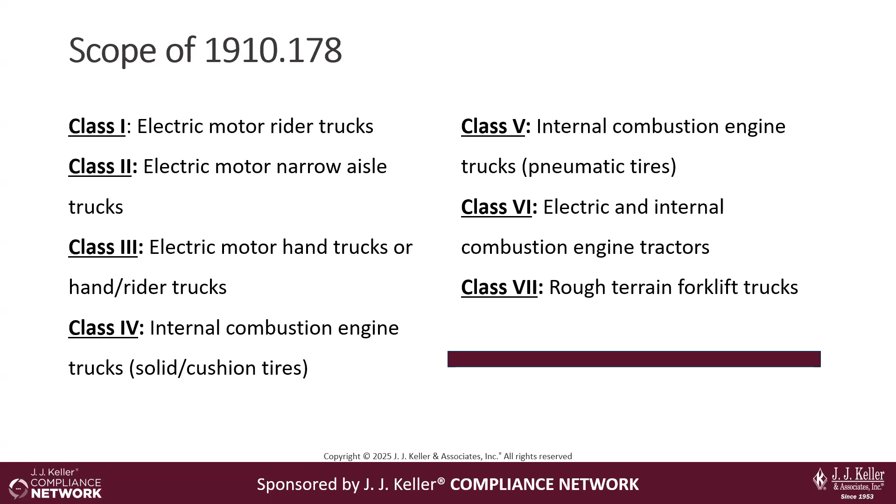So let's talk about what the standard does not cover. The major exception involves earth moving equipment. I'm talking front end loaders, backhoe loaders, things like that. These are not under the forklift standard. Even if this equipment has been modified to accept forks, OSHA said equipment that's designed to move earth is not under 1910-178. Also, we've been told by OSHA that golf carts are not covered, and there's letters of interpretation stating that scissor lifts are not covered. These are generally people movers, not material movers. Now, of course, you probably want to train scissor lift operators, but it's not actually under 178. And then, of course, equipment like hand carts that are not powered. A pallet jack, for example, a non-powered pallet jack, that's not covered because, hey, they're not powered vehicles.

Now, depending on the industry, the equipment might be covered under another standard. There's a construction standard on material handling equipment, for example. And of course, the general duty clause would apply where OSHA often references industry standards and manufacturer operating instructions. So, like for scissor lifts, I mentioned, you do want to train scissor lift operators even if they're not falling under the forklift standard.

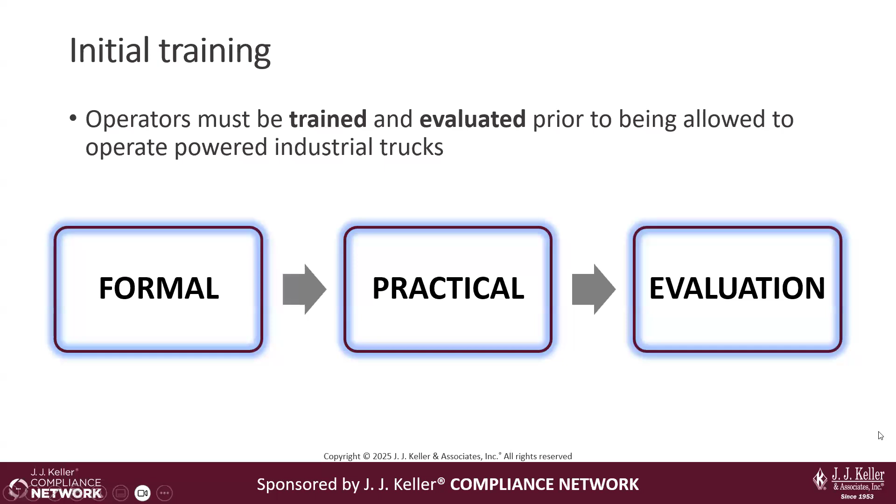So aside from requirements for how to do the training, OSHA does give a fairly detailed list of topics to cover during training. The main categories are truck-related topics and workplace-related topics.

Remember, OSHA does require you to include information on that forklift standard 1910-178 as part of the training. That can be easy to overlook, and a good way to approach it is during that classroom portion of the program. So as we go over the truck and workplace related topics, keep in mind if a topic does not apply to your vehicles or your workplace, you don't have to train on it.

For example, if you don't have any ramps or inclines in your facility, your operators don't need training on that, or if there's no hazardous atmosphere environments or something like that.

Now, the way the standard is written, you might want something to back up and justify your decision to skip a topic, just in case an OSHA inspector asks about it. So maybe you put down a written statement that a survey of the workplace found that there are no ramps or inclines in the facility, so that's why you didn't train on it, and you can sign and date that statement. It's a just-in-case kind of thing.

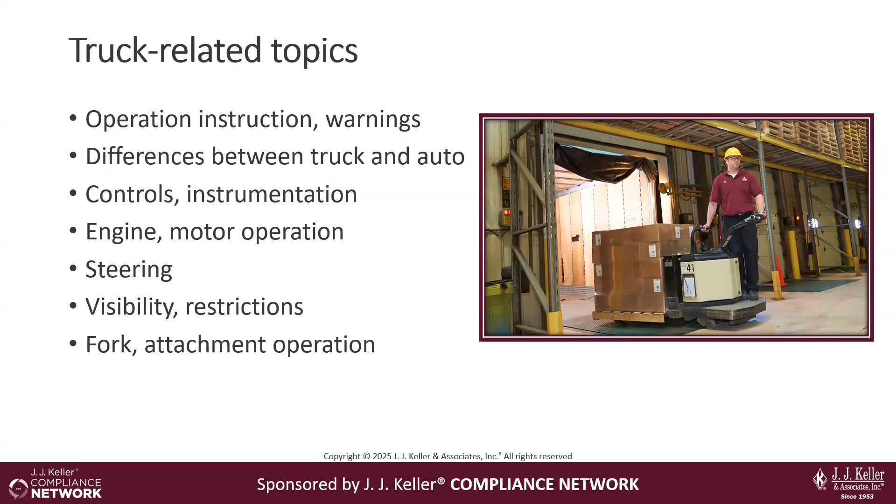On the operator's manual, we get questions on access to it. OSHA does not require that you keep it on the truck—I think it'd get dirty or fall off. In fact, it doesn't specifically require you to provide employee access to the manual, but it does make sense to have that available. And of course, if you do any in-house maintenance or repairs, your mechanics are going to want to be able to refer to that manual also.

A lot of these truck related topics lend themselves to the practical part of the training program. It's easier to demonstrate how the controls work and show them the capacity plate rather than trying to describe that during a classroom lecture. But you can still introduce these topics in the classroom portion, and then it's more of a specific review when you get out there, and easier to answer questions sometimes in the classroom.

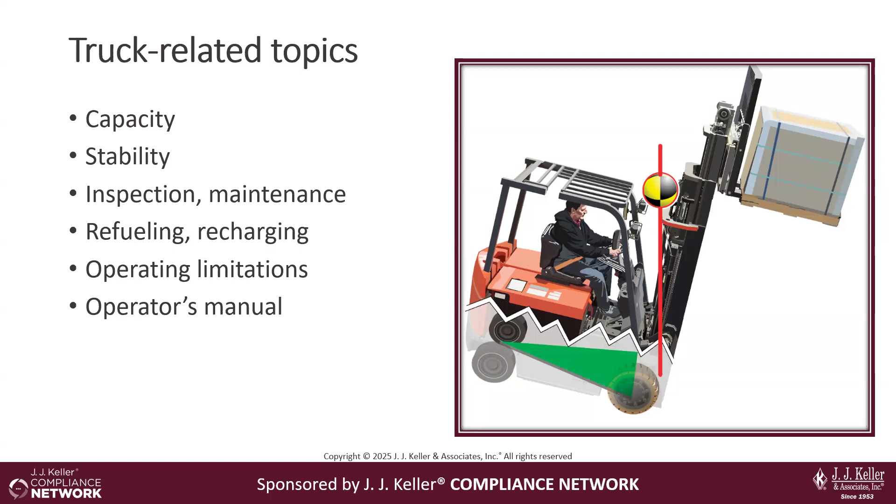Now let's get into the workplace specific topics. A lot of these are unique to your facility. Training videos and other products can cover things like inclines, but it's not quite the same as your workplace necessarily. So videos and other training materials are valuable additions to your program—employees will learn a lot from them—but you will need to verify that you've covered all the specific information and hazards in your workplace as your operators are running in that area.

Trainees must successfully complete the formal and practical portions. How you determine that success is completely up to you. For the classroom portion, you might give a written test or a verbal test or otherwise evaluate their knowledge. We get asked how many questions can they get wrong—well, that's entirely up to you. For the practical training, of course, the trainee must be able to safely perform the operations that they're going to use on the job.

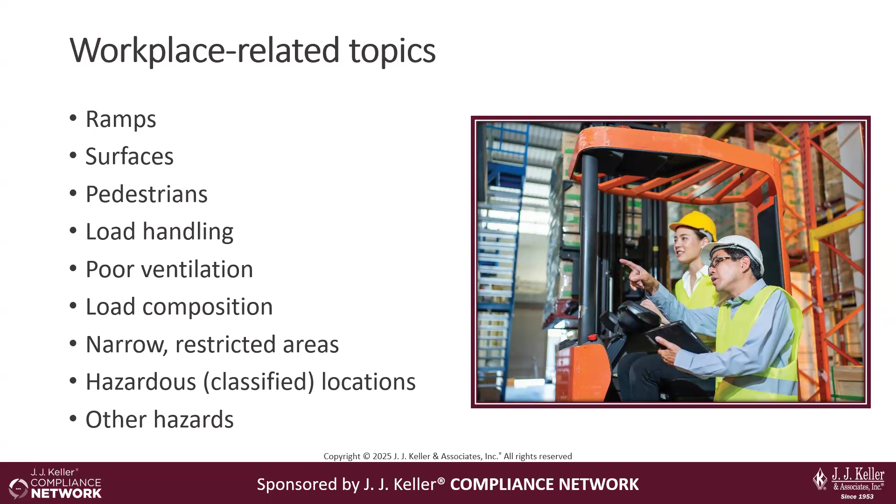So far, everything we've said about training applies to initial training for new operators. But this also leads us to a discussion on refresher training and on avoiding duplicative training. Sometimes you get a newly hired forklift operator who has experience, maybe with a previous employer. As we'll discuss shortly, OSHA does allow you to accept previous training, but generally experienced hires, even if someone's been driving a forklift 20 years, they're still going to need training on the workplace specific topics and situations unique to your operating environment.

It could be because the operator was observed operating the vehicle in an unsafe manner—that would trigger the need for refresher training. Or it could be because there's an incident or a near miss. Safety issues could be uncovered during a performance evaluation, or the operator is assigned to drive a different type of truck. For example, if you have an operator trained on a sit-down rider versus a stand-up truck or an order picker or something else, operators need to be trained on each type of forklift they will be operating.

Another reason refresher training may be necessary is if you have a condition in the workplace that changes in a manner that could affect safe operation of the truck. So the example used earlier—if your workplace does not have any ramps or inclines, you don't necessarily need to train your operators on that particular topic. Now, if your facility does upgrades, or there's been changes or recent construction, where now all of a sudden you do have ramps and inclines, that would be a cause for refresher training, at least on that topic.

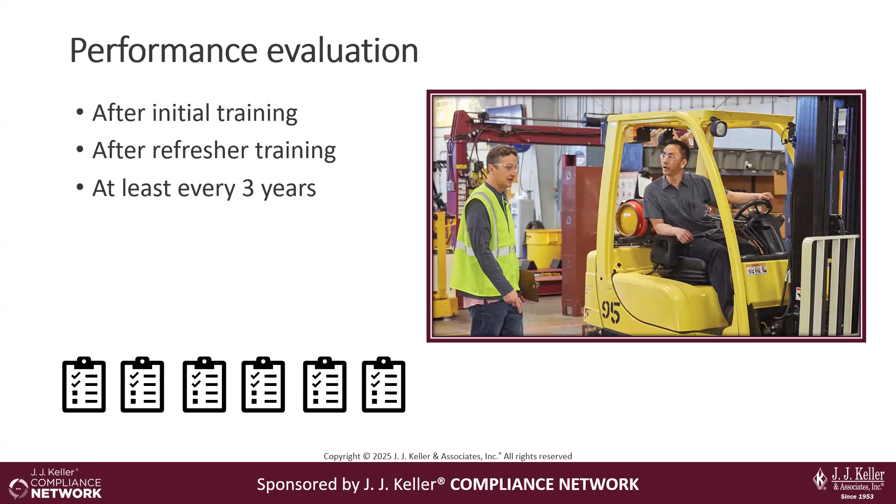A key point to note here is that this evaluation must be more than just a written or verbal test. The employer must observe the operator in action performing all tasks related to running the forklift. And the evaluation must be conducted by someone who has the knowledge, training, and experience to evaluate the truck operator's competence. Sometimes these evaluations can last over the period of a few days if the operators are operating multiple types of forklifts or in multiple different areas. So you want to make sure you're providing a solid evaluation of their competency at least every 3 years.

Now, another common question we get is if OSHA requires giving operators a wallet card or a license. Federal OSHA does not require a license or a wallet card. It may be somewhat common in some industries, although employers are not required to do this. Wallet cards do help supervisors quickly determine what type of equipment employees have been trained on, and can also reinforce to operators just how critical forklift operation is. Having something tangible that lets someone know yes, you can operate this equipment, or no, you haven't been qualified, can go a long way and say a lot. So even though federal OSHA doesn't require it, it may not be a bad idea for employers to issue these certification cards.

Now, OSHA only requires that the employer certify the training has been done. This simply means placing a record on file that the training and evaluation was completed, along with the operator's name, the date of training, the date of evaluation, and the names of the persons who performed the training and evaluation. So if you have multiple trainers involved, where maybe one trainer is doing the classroom portion and another trainer, an experienced operator, is doing the field evaluation, make sure you're capturing the names of all trainers involved.

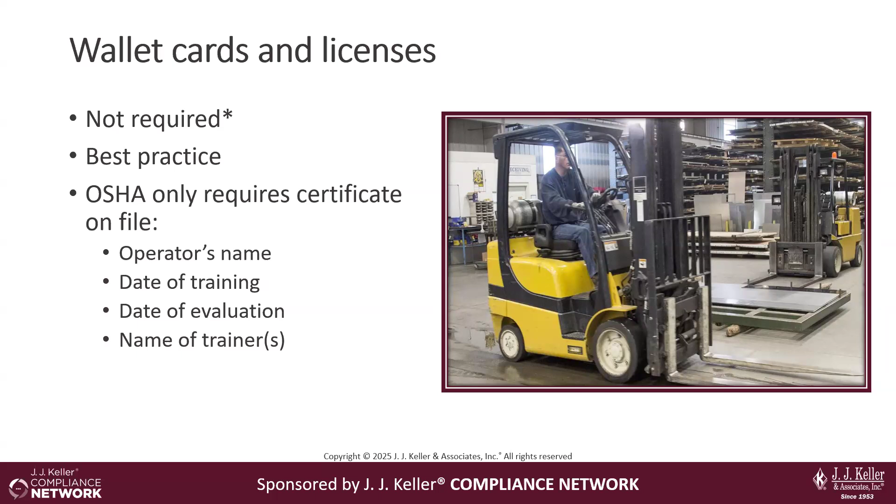All right, with that, I'm going to pass it back to Ed, and he's going to talk about forklift maintenance.

Thank you again. Maintenance questions do come up. Of course, if a truck is not safe to operate, you take it out of service immediately. If repairs need to be done, only an authorized person should perform them. Generally, the operator has not been trained to do repairs, and they're probably not authorized by the employer to do that. Repairs shouldn't be made where there's flammable gases or vapors present, or combustible dust, or other easily ignitable fibers. These are known as your class 1, 2, and 3 locations. So be careful of fire hazards when working on the fuel or ignition systems, and be aware that electric forklifts have their own set of hazards.

Also, use replacement parts from the manufacturer, as they should have the proper parts. We have seen issues when employers tried to use a more generic part and it doesn't quite fit. Also, operators should not alter the truck by adding parts that were not approved. You need to get permission from the manufacturer, or a professional engineer can approve it. But things like adding counterweights or even just adding lights are technically modifications to the forklift.

All right, inspections. In this section, we're going to answer some questions like: what are the OSHA requirements? What does the inspection consist of? When do you know if an issue warrants taking the vehicle out of service? And do inspections have to be documented? Oh, we get that one a lot.

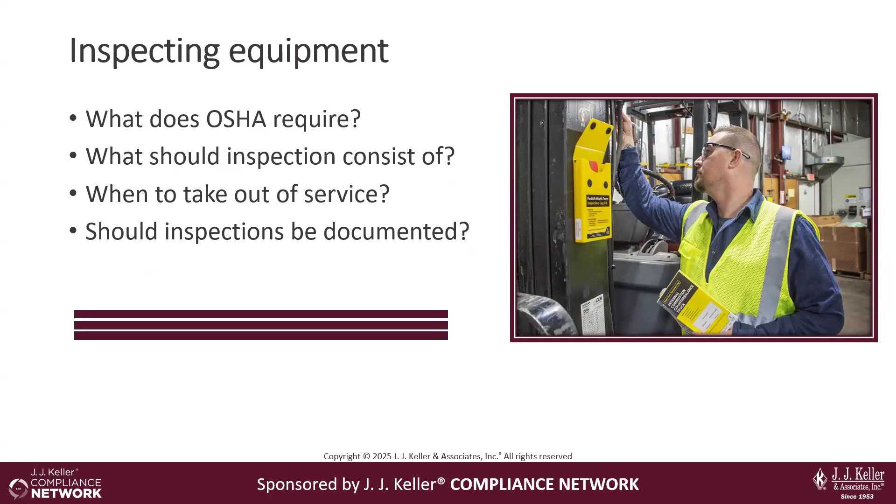So OSHA does require that equipment be inspected daily prior to use, or after each shift if used around the clock. The reg does say after the shift, but usually the next person does it at the start of the shift. That's a somewhat vague requirement, and I think that's why we get so many questions.

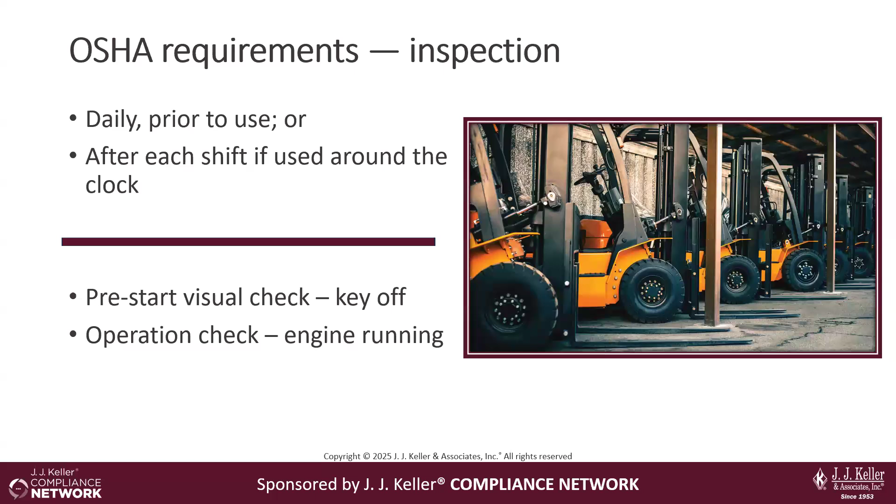So for how to inspect, first check the manufacturer's recommendations, because every truck is going to have specific features and unique inspection needs. Generally, an inspection should consist of two parts. First, the operator would do a pre-start visual check with the key off. Then the operator will perform an operational check with the engine running. Let me get a little more detail there.

So for that pre-start, on your screen here are some common items general to most forklifts. Again, these are not in the OSHA standard; they are based on recommendations in OSHA's online forklift e-tool. Of course, a lot of these things appear in most operating manuals - fluid levels, for example. You want to check fluid levels, leaks, cracks, defects, pretty much all parts of the forklift that you can check with the engine off. Give close attention to tires and fork condition, anything that could really jeopardize safety.

Note that these are most the general items for most forklifts. Again, there's going to be additional items, like say for an electric forklift or an LP gas fueled forklift, and those types may require additional PPE for the inspection. With electric forklifts, there's potential for battery electrolyte exposure.

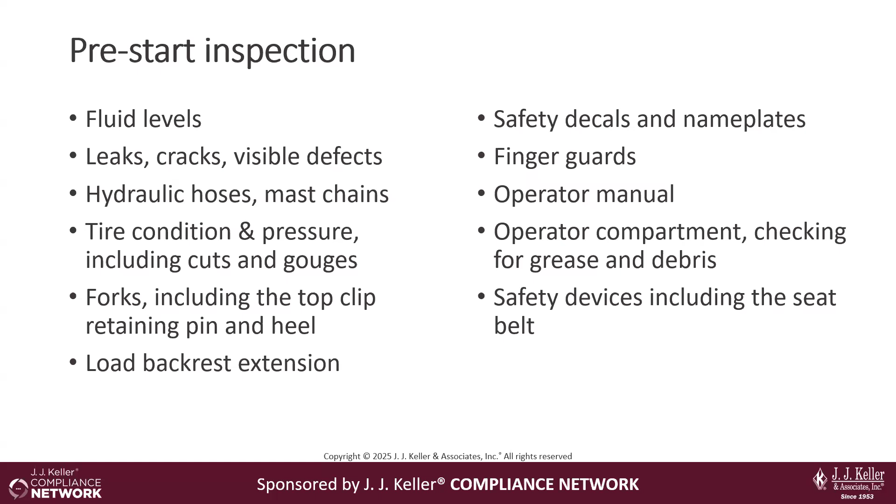And of course, if you're changing the cylinder on an LP gas forklift, there could be a risk of freeze burn. So make sure employees have the personal protective equipment needed.

Make sure everything's working. Even something like a non-functioning horn or a light not working does require removing the equipment from service for repair. You can't just, I actually talked to one guy who did an OSHA inspection and he said the forklift driver was yelling honk honk at intersections because the horn wasn't working. He said, no, that's not good enough.

And again, aside from these items we've been talking about, check the manufacturer's recommendations as well. Each truck, of course, is going to have unique features and may require unique inspections.

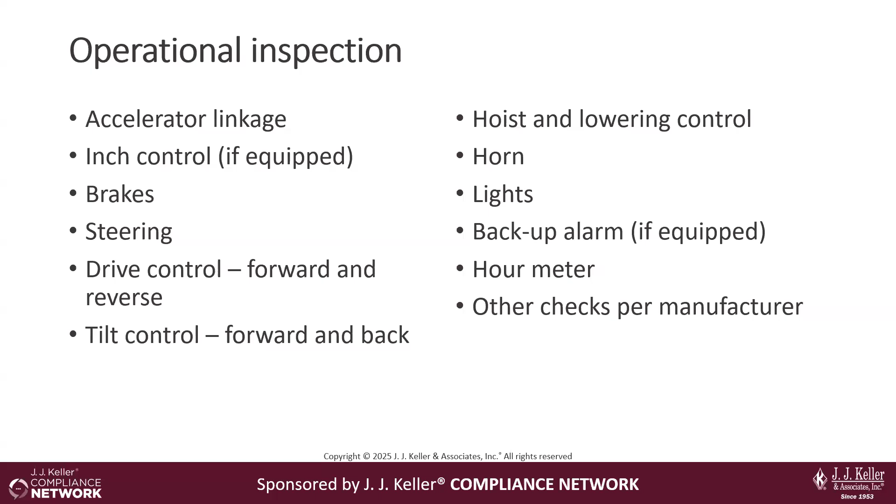All right, so if you're doing the daily inspection, are you keeping records? Well, believe it or not, OSHA does not actually require that you document your daily inspections or even do them in writing. And that, of course, means the related question we get, how long do we keep the records? Well, there's no record retention time. You can document them, but there's no retention period.

Now, obviously, even though it's not required, using a checklist, whether it's electronic or on paper, it's a good idea for a couple of reasons. First, it ensures that all essential features of the vehicle are inspected. It'd be easy for someone to overlook or forget something. And it can help provide evidence to an OSHA compliance officer that the vehicles are in fact being inspected as required.

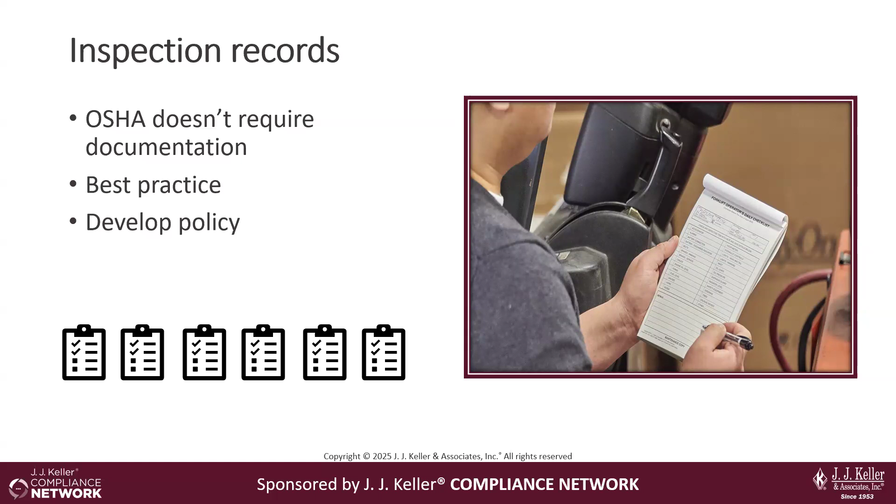By the way, if you want to keep them, my best answer is 6 months because OSHA has a 6-month statute of limitations to issue a citation. So if it's been more than 6 months since you did an inspection, if you missed a day, they can't cite you for that anyway.

All right, back to Gina to talk about attachments and modifications. I know this is one of her favorites.

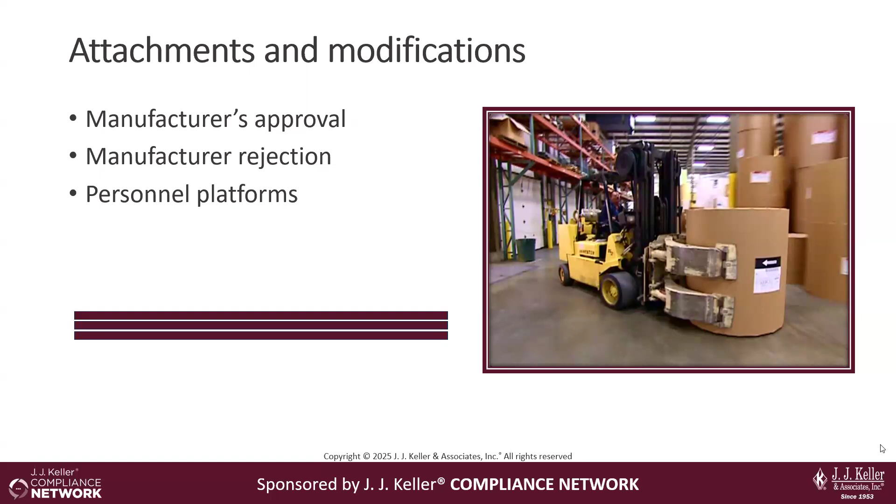Thank you, Ed. Yes. So, as mentioned, we're going to be moving on to attachments, modifications, and we'll answer questions about things like getting manufacturer's approval, what to do if the manufacturer rejects your request for additional modifications. And we'll also talk about personnel platforms, which is a topic that I think I mentioned earlier, we get a lot of questions on. So, let's dive in.

Here's one of those things that trips people up a lot. So OSHA requires that manufacturer written approval for additions or modifications that affect capacity and safe operation. This is one of those, hot topics. So OSHA has interpreted this pretty liberally to cover anything from warning lights to personnel platforms.

So if you plan on adding to or modifying your powered industrial trucks, you must get the manufacturer's prior written approval and then should change the capacity plates and any operating instructions accordingly. So there can be a lot that goes into that.

But what do you do if the manufacturer says no or simply doesn't reply at all? And as you can imagine, that's pretty common for the manufacturer not to give a response at all, or even simply say, no, we don't approve this type of modification. And that, again, happens a lot, and OSHA does address it.

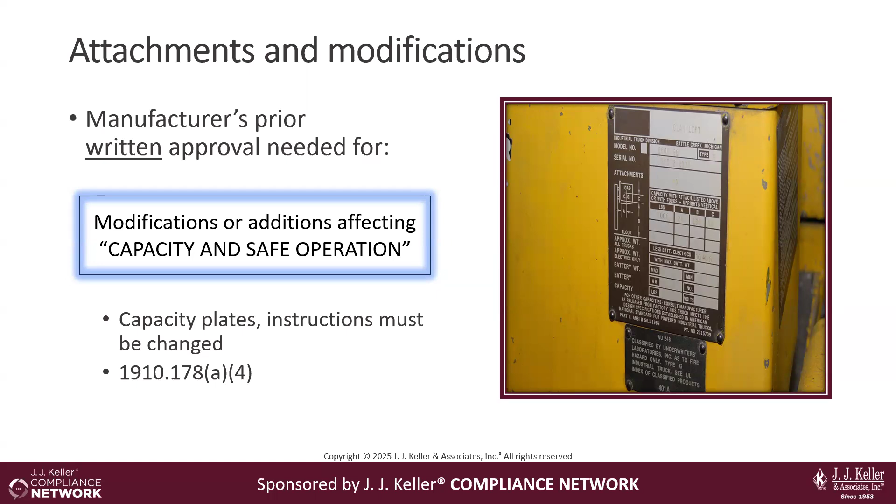So in an April 1997 letter of interpretation, OSHA said that if an employer seeks written approval from the manufacturer for modifications or additions to a forklift and the manufacturer says no, or if they don't respond, then OSHA will accept a written approval of that modification or addition from a qualified registered professional engineer. So you can get a PE to sign off on whatever addition or modification you're making if the manufacturer says no, or if they simply don't respond.

Now, the PE must perform a safety analysis and address any safety or structural issues contained in the manufacturer's negative response prior to granting approval. Also, make sure that you change the equipment's data plates accordingly, because that is the main thing that OSHA will be looking for modifications.

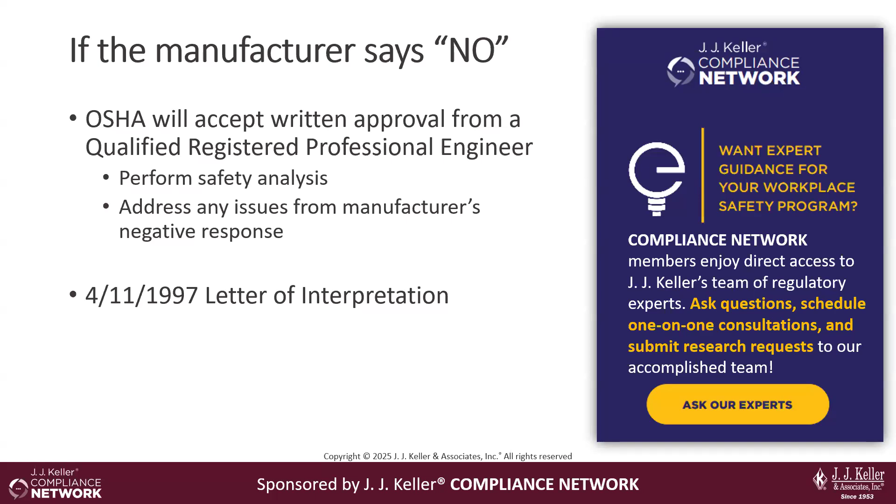Moving on to personnel platforms, also known as man baskets or work platform cages. OSHA says that the platforms are considered attachments, and so therefore these would require the manufacturer's written approval before using them. So that's the first thing to consider: we're talking about adding a platform to equipment such as a sit-down forklift, directly to the forks, and not just using equipment designed to lift personnel like order pickers.

This does not apply to order pickers. It does not apply to aerial lifts and scissor lifts that are not covered under the forklift powered industrial truck standard. But once you've determined that it's okay with the manufacturer, then you have to deal with the safety issues.

So we have fall hazards. Fall hazards are obviously a major concern, so workers must be protected either by guardrails or by a personal fall arrest system. In addition, the platform itself needs to be secured. Otherwise, it can tip off or slide off, and obviously that's not a situation we want to expose our workers to. In addition, the operator needs to remain at the controls and exercise caution during operation.

So the OSHA regulation doesn't really get into the details of using personnel platforms, but OSHA has referenced the industry standard, the ANSI industry standard, B56.1. That provides quite a bit of guidance on fall protection and using secured personnel platforms, and procedures for elevating personnel on forklifts and powered industrial trucks.

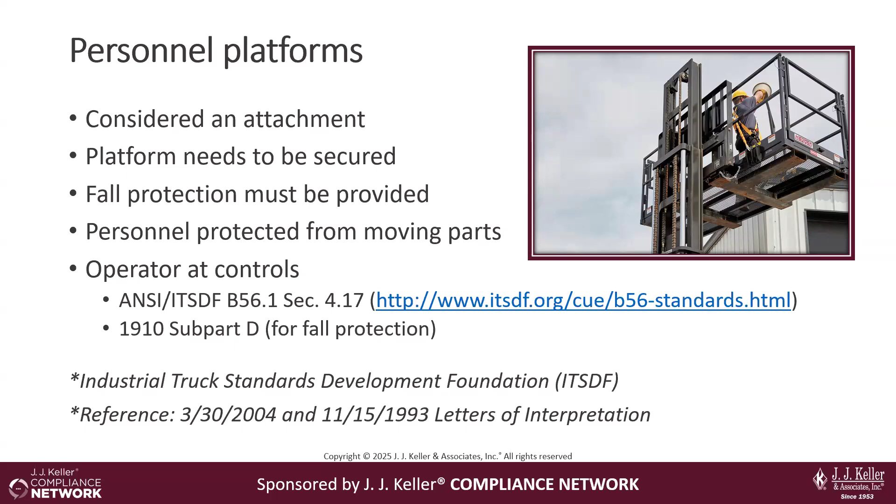And while you're doing that, I can share a personal experience. I was a forklift driver back in the 1990s, so we're well past any statute of limitations on that. But I can tell you, when you're doing things unsafe, I had done things like raising the tines before I came to a complete stop in front of the rack, or carrying unstable loads that were bouncing around that I really shouldn't have been carrying. So these are the kind of things you can observe people doing unsafely. I was in college back then.

I didn't really have refresher training on that, and I didn't cause any accidents. But these are things where you get observations, and we don't want to wait until there's a near miss, right? We don't want to wait until somebody gets injured or almost gets injured. So if a supervisor sees someone doing something unsafe, they'd better be able to recognize that and report it up the line. Then the supervisor might not be the one doing the refresher training—as Gina said, it's got to be someone qualified as a forklift trainer who gives that training. Maybe training isn't the solution here; there might be other issues involved, but OSHA does at least address it.

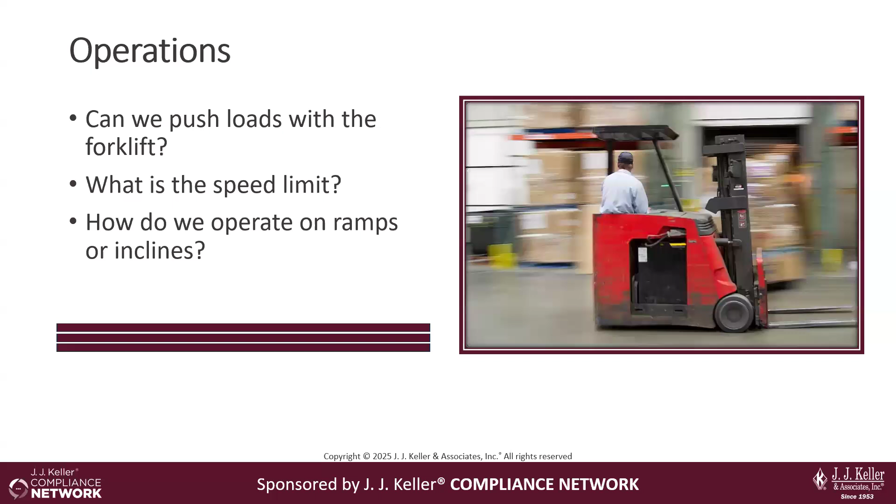I want to start with split forking and bulldozing. Split forking is when you lift two pallets using one fork each, and bulldozing means pushing a load on the floor with the forks. OSHA says those two practices could result in any number of hazards. First, forklifts are probably not designed to lift and move loads in the split forking or bulldozing manner. OSHA requires that employees receive training on any operating instructions, warnings, precautions, or prohibitions in the operator manual. So if the manual says do not do that, it has to be included in the training.

And of course, pushing a load around the ground - your loads are supposed to be stable and safely arranged. Depending on the equipment or conditions, these practices could result in problems. There's a letter of interpretation from 1999 that addresses this. One of the other violations I saw was using a forklift as a snowplow to move snow out of the way. I think that's kind of similar to bulldozing, but that is not the intended use of the truck.

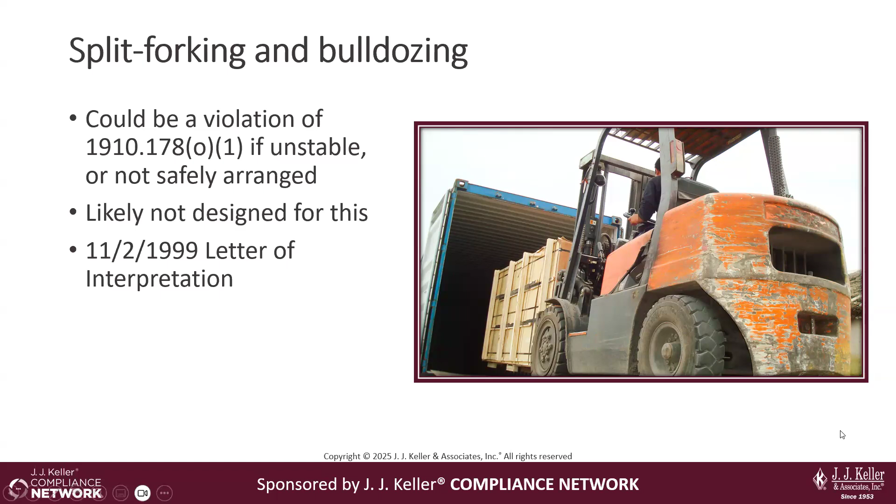Speed limits - what about this? Well, OSHA doesn't have specific speed limits for powered industrial trucks. They do generally address it in paragraph (n)(1) of the standard by requiring operators to follow authorized plant speed limits. Of course, a lot of forklifts don't even have speedometers.

So in determining what is a safe speed, OSHA would take a variety of factors into account: truck type, pedestrian traffic, stopping distances. If a specific speed limit isn't available, OSHA will consider the circumstances surrounding the totality of the operation in determining whether safe speeds are being practiced. Very often that might just be a walking speed or not much more. As Gina mentioned, ANSI standard B56.1 does have some formulas that can help you determine the speed in a facility. But again, if you're at sprinting speed or going high speed, you might be pushing too quick - it depends on the situation.

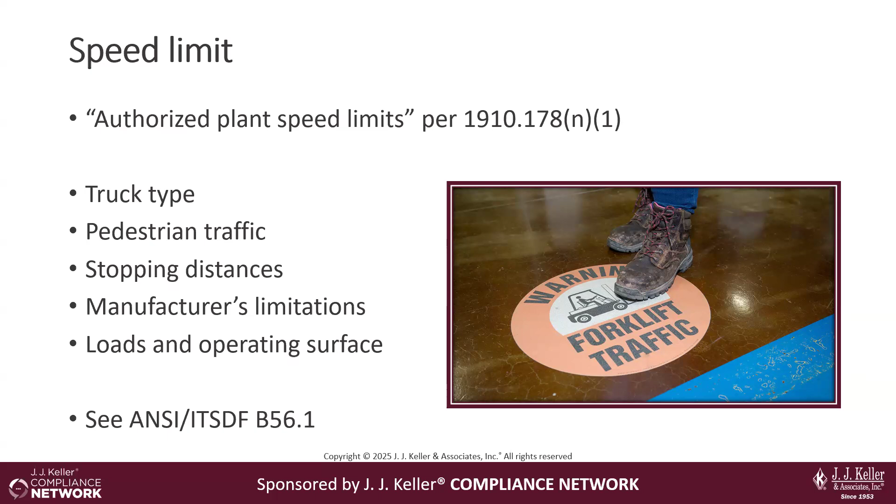Another source of confusion lies with ramps and inclines - we get quite a few questions about this. With a typical sit-down forklift, you will always point the forks uphill when you are carrying a load. It doesn't matter if you're going uphill or downhill, regardless of direction of travel.

So going up the incline, operators will drive with forks pointed upgrade and use a spotter if you can't see the room you're going into. When going down the incline, you'll drive in reverse so the forks are still pointed upgrade. That's when carrying a load. On the other hand, if you're traveling without a load, the forks should point downgrade regardless of direction of travel. So you'll go down driving forward, and if you're going up the ramp, you're going in reverse. That's for a standard sit-down forklift.

It's a little different with a pallet jack. If you've got a powered pallet jack, the forks should be pointed downgrade regardless of the direction of travel and regardless of whether or not there's a load.

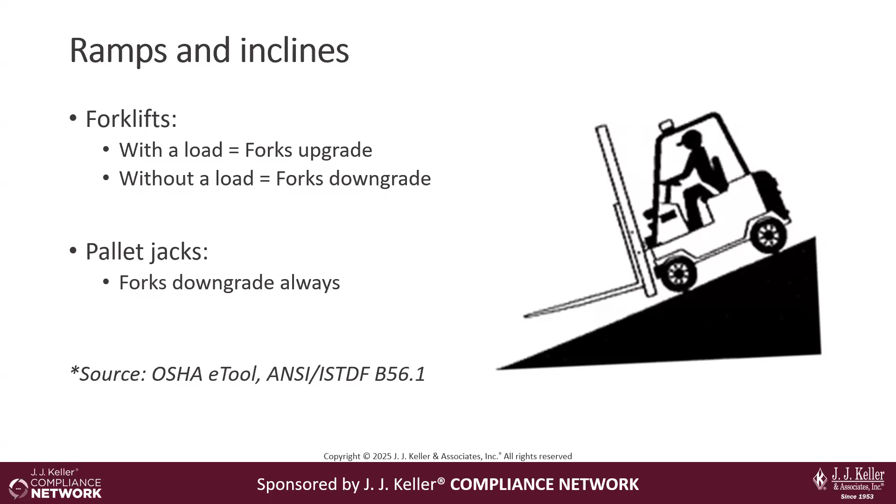All right, thanks, Ed. Yeah, so we've covered quite a bit today. Just to recap a couple of the key items here: remember, if it moves material other than earth and is powered, then there's a good chance that it falls under OSHA's 1910.178 standard for forklifts and powered industrial trucks. Obviously, training is a major issue, and we want to make sure that we're conducting the training with the formal instruction, practical training, evaluation, and certification refresher requirements.

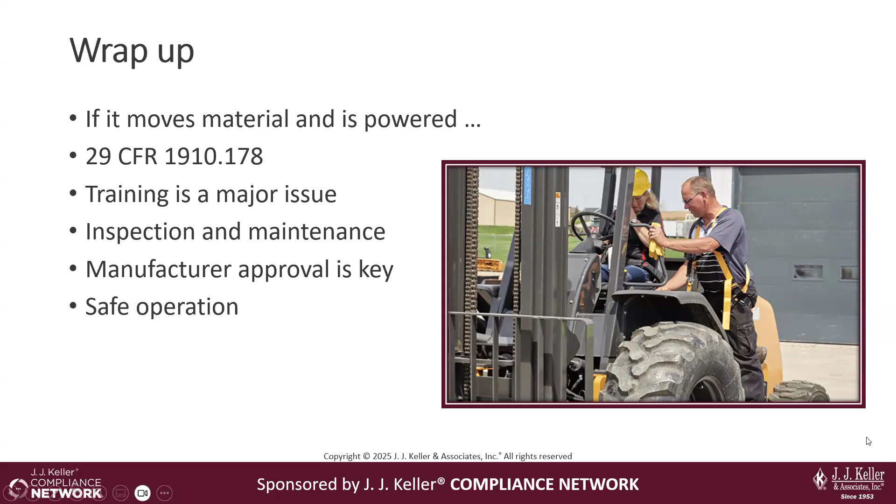There's also very strict requirements for inspection and maintenance. We talked about a lot of the safe operating procedures and some of the key things you need to include in your training. We also talked about manufacturer approval and when that comes into play with things like attachments and modification. So we covered quite a bit of ground. Ed, do you have one more poll for us before we get to questions?